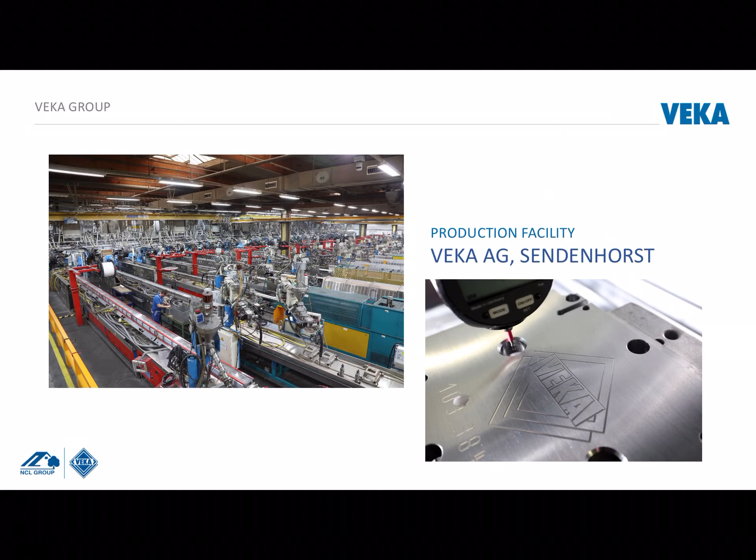This is the extrusion facility in Veka AG, Sendenhorst.

So now coming to the Indian network, Veka operates in two different ways. First is direct sales, and the other is through our authorized channel partners or authorized fabricators. We have around 120 such fabricators spread across India who deal only with Veka profiles. All our fabricators are professionally trained and equipped with sophisticated machineries to fabricate excellent quality windows and doors.

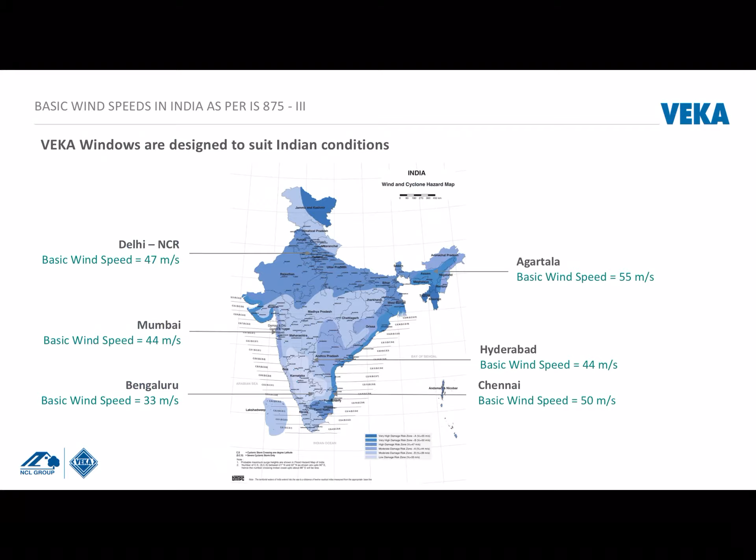We at NCL VEKA just don't put windows together, but we engineer them to be perfect.

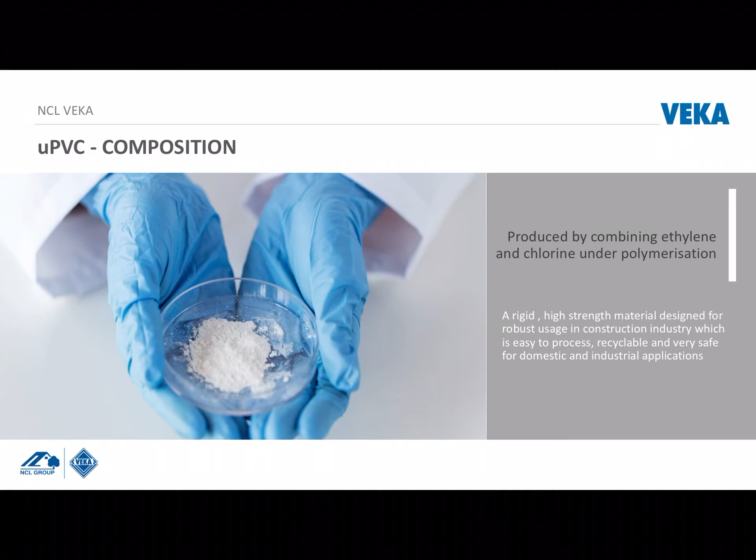Our PVC resins are sourced mainly from Reliance, a rigid high strength material designed for robust usage in the construction industry, which is easy to process, recyclable, and very safe for domestic and industrial applications.

As I explained earlier, our main USP is the TPE gasket, which is weldable and comes with 10 years warranty. We also offer double layer gasket to ensure proper sealing to eliminate dust and pollutants.

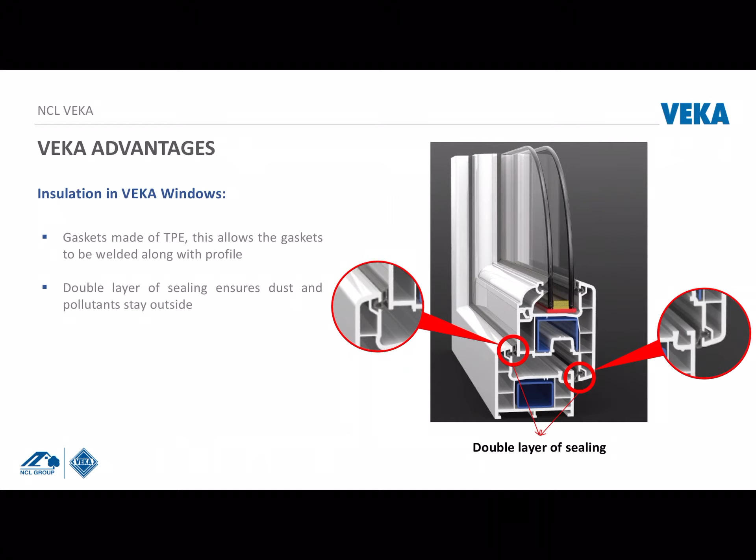Now coming to the technical part, we have different series both in sliding as well as casement. In sliding we offer I44, I50, I60, I64 and I75 series, and in casement we offer I39 series and I60 series.

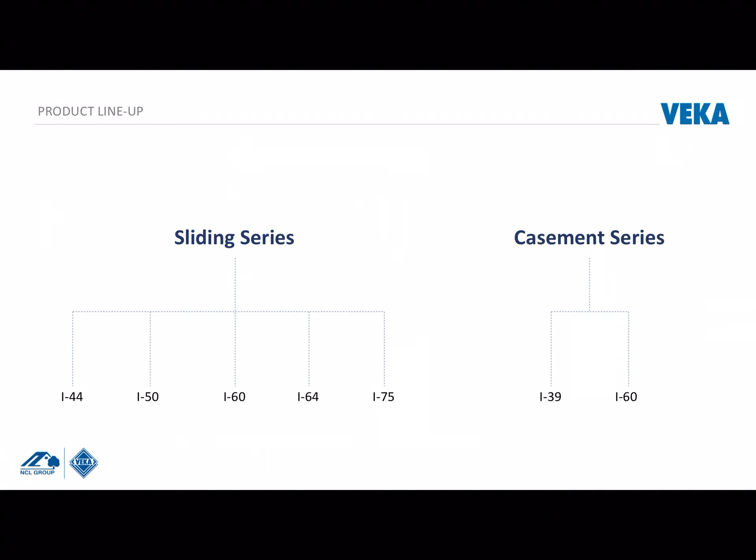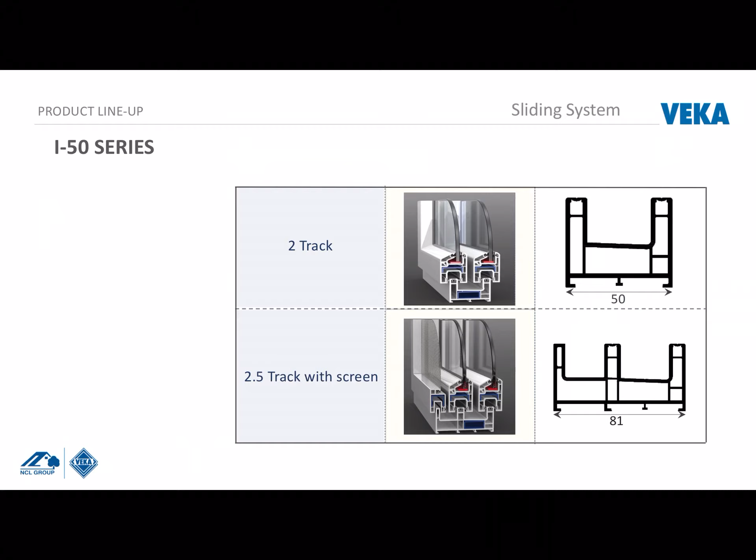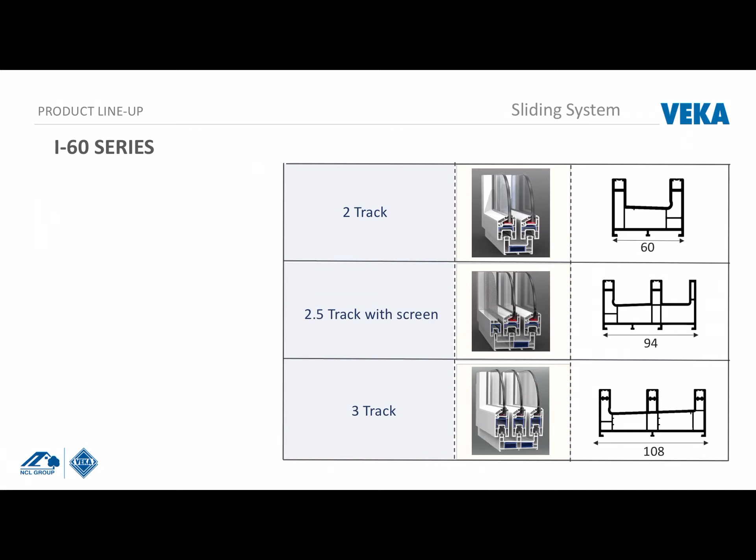In I50 series, 50 mainly stands for the thickness of the 2-track profile, and keeping that as base, we design a 2.5 track, which is with mesh. Similarly, in I60 series, 60 stands for 2 track, and apart from 2.5 track, we also offer 3 track for full height sliding doors. In this series, just like I60, we also have I64 series, mainly used for the retail segment.

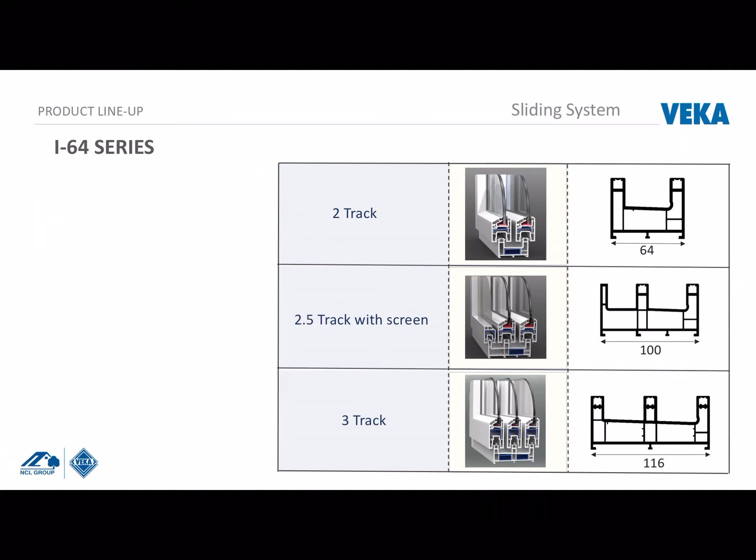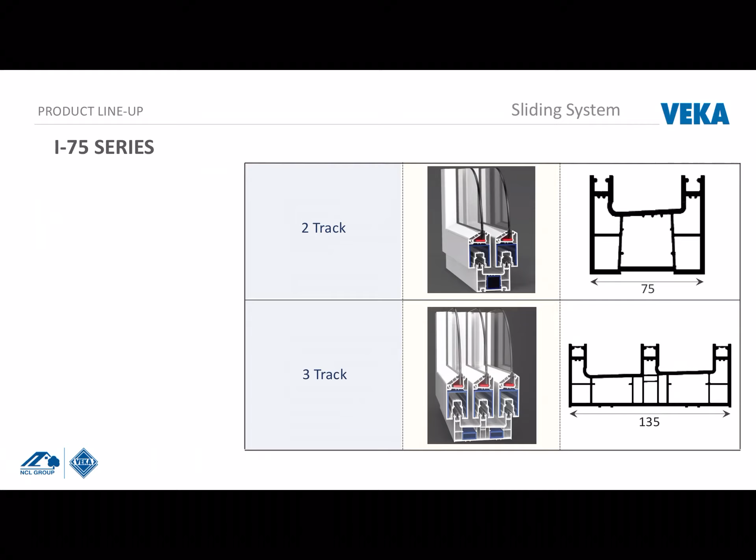This is mainly sturdier and the most preferred section in individual homes. We also have I75 series, which is our largest profile section in sliding, and we can offer sliding doors as large as 10 feet height using this series.

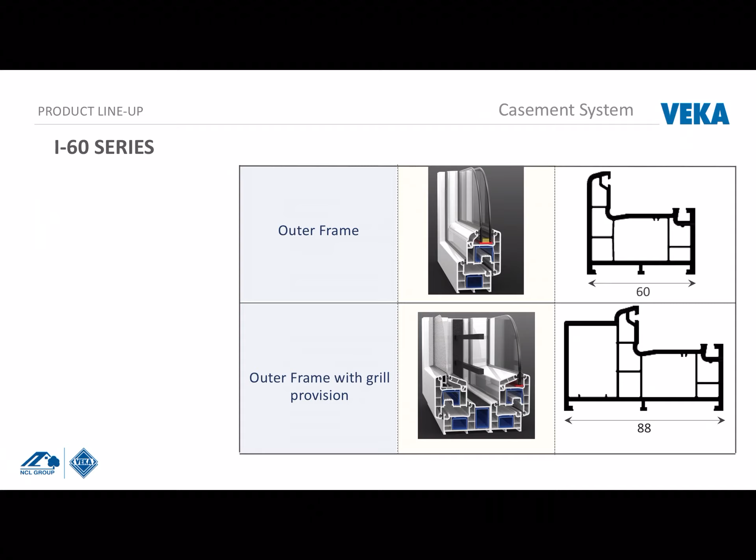Now coming to casement, we have regular openable casement windows as well as casement with grill and mesh. In compact series, we have both casement and sliding. I39 is mainly used for ventilators, both top hung as well as with louvers, and I44 is mainly used for very small windows, of size below 4 feet by 4 feet.

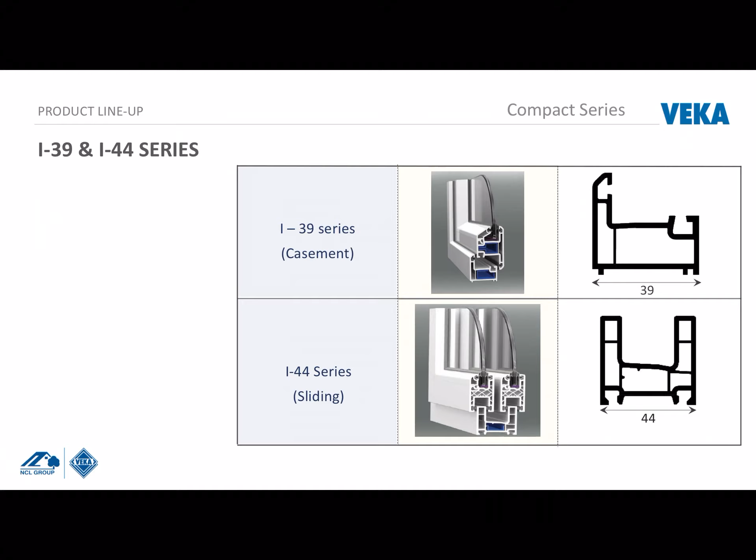So this series which I explained comes under VEKA I series, which are extruded in India. Apart from this series, we also offer VEKA Diamond series, which are imported from the VEKA factory.

VEKA Diamond is basically a super premium series which comes with 5 chambers and wall thickness of around 2.8 mm, whereas in VEKA I series the wall thickness ranges from 2.4 mm to 2.6 mm.

In VEKA Diamond we have different series like Matrix 60, SS73, SS90 under sliding, AD70 and Matrix 60 under casement, and also one special system called lift and slide. Each shutter can go up to 3 meter by 3 meter height in this lift and slide system.

We also offer special colors called spectral laminated color range for VEKA Diamond. In VEKA I series we offer 4 different laminated colors: mahogany, rustic oak, golden oak, and anthracite grey.

These are images of some of the profiles in different series using which windows are fabricated.

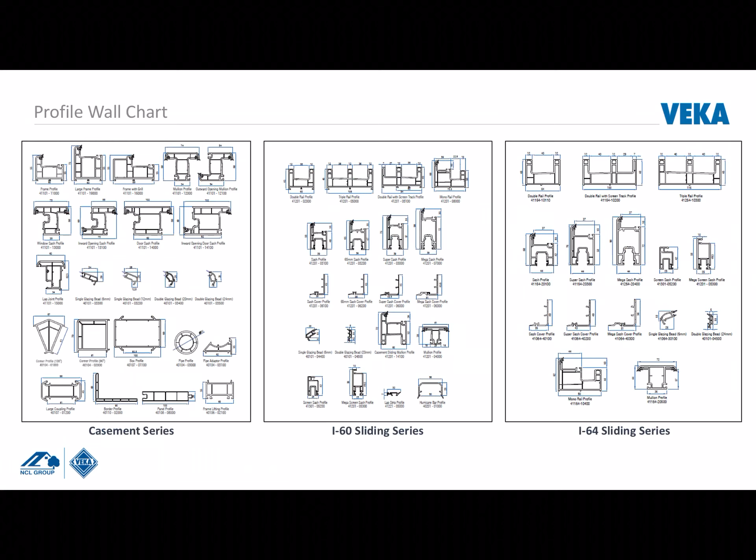Now for a window to work perfectly, there should be proper hardware as well. Our specialty is we are into hardware as well, under a brand name called Oben. We offer excellent quality hardware which has been tested for corrosion and durability as per international standards. They are mainly outsourced from leading hardware manufacturers across the world.